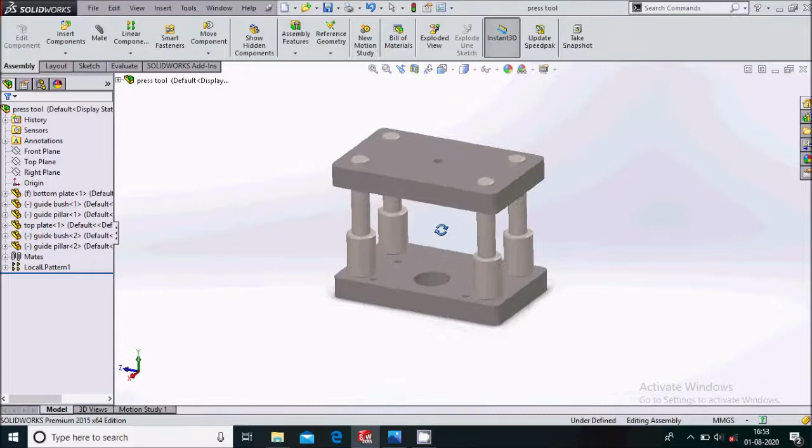Hello everyone, in this video we will create a simple press tool based assembly in SolidWorks. So let us start.

Go to file, new, click on a part, OK. So we'll first design the top plate.

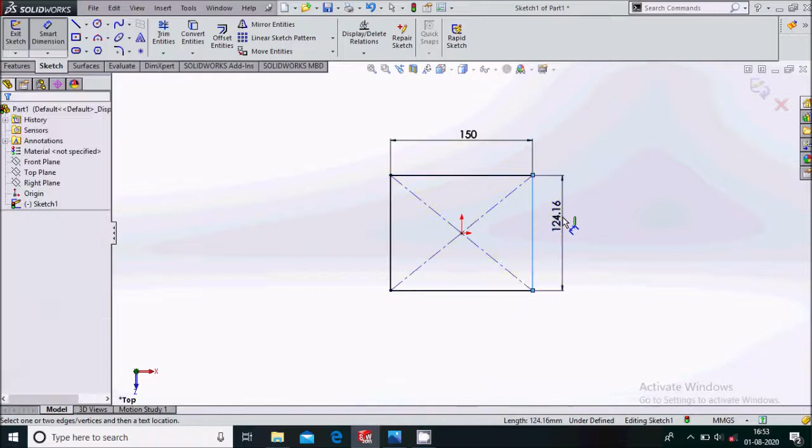Sketch on the top plane, select the center rectangle, draw a rectangle by 250 by 150, so it should be 250.

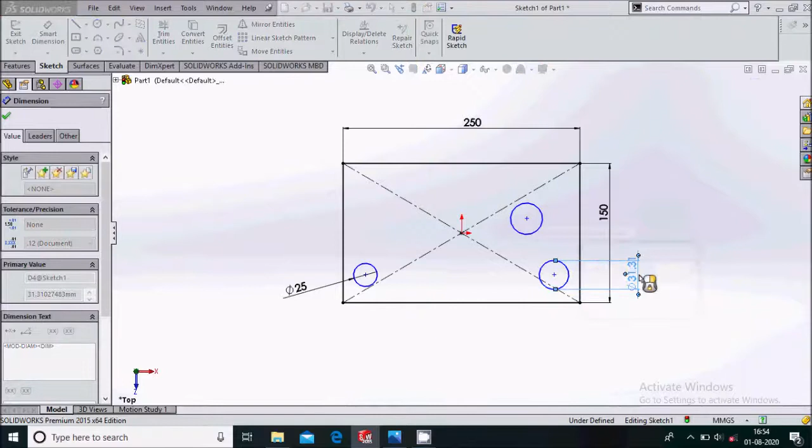Now we'll draw some circles over here. Smart dimension them, this to be 25 mm, this to be 25 mm, this to be 12 mm.

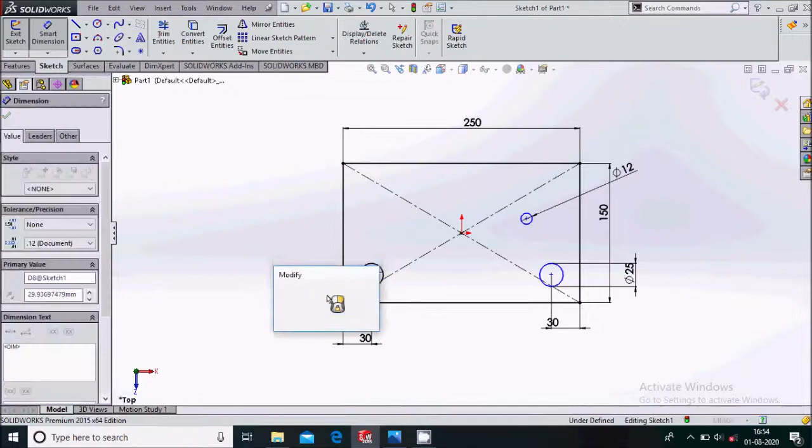Give the distances from the edges: this to be 30 mm, this to be 30 mm, this distance to be 30 mm, this distance again 30 mm.

We will give the distance of this and this to be 125, and from here the distance will be 75.

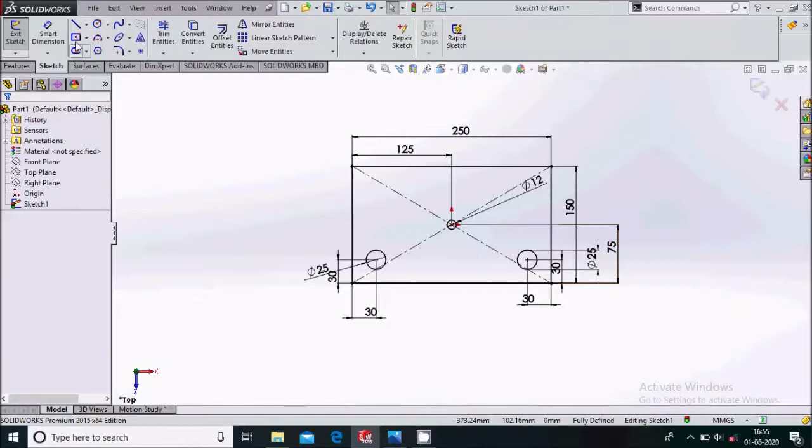Now we will draw a center line over here simply, and we will select these two circles and select mirror entities, and mirror about this center line.

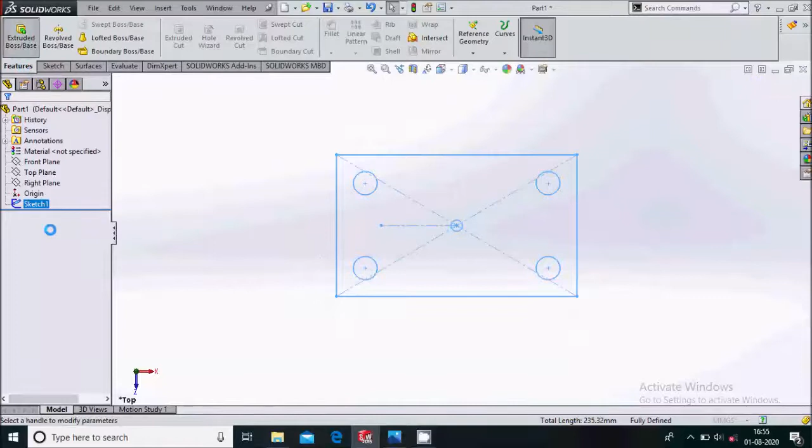We'll exit the sketch and go to the feature, extrude it by 30 mm. So this is our top plate which is ready.

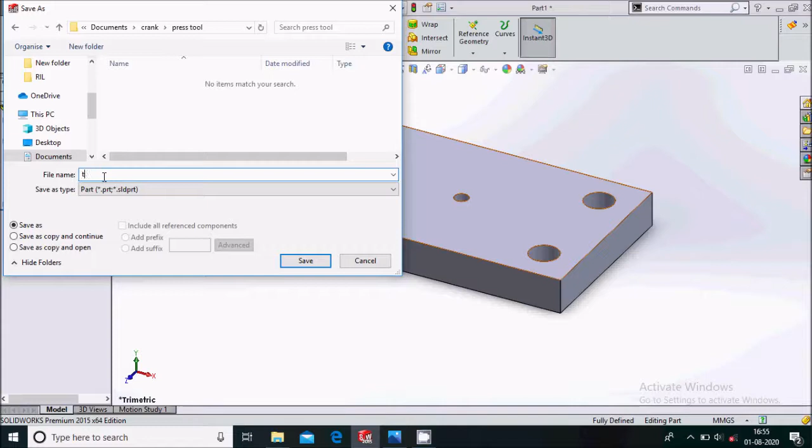Control save this. We'll make one folder over here, create new folder, and name it press tool. Open this folder and save this part as top plate.

After saving this, close this. We'll go to the next part, that is the bottom plate. Again we'll select the top plane, sketch on it, draw the same.

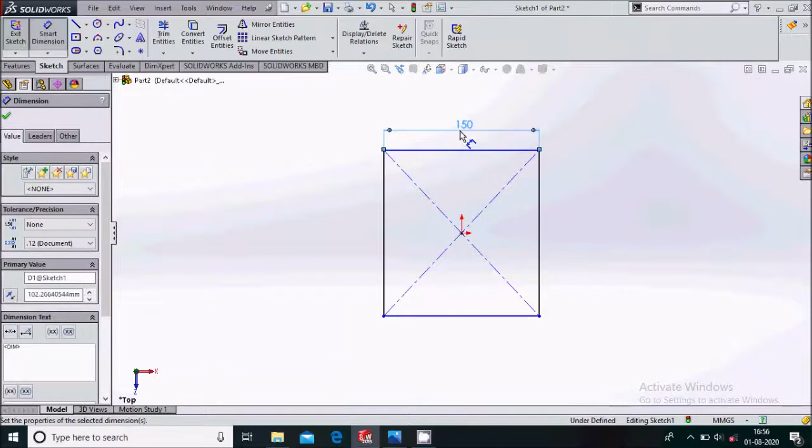Give the smart dimension, this to be 150, this to be 250.

We'll draw some circles over here: first circle, second circle, then we'll draw the third circle over here.

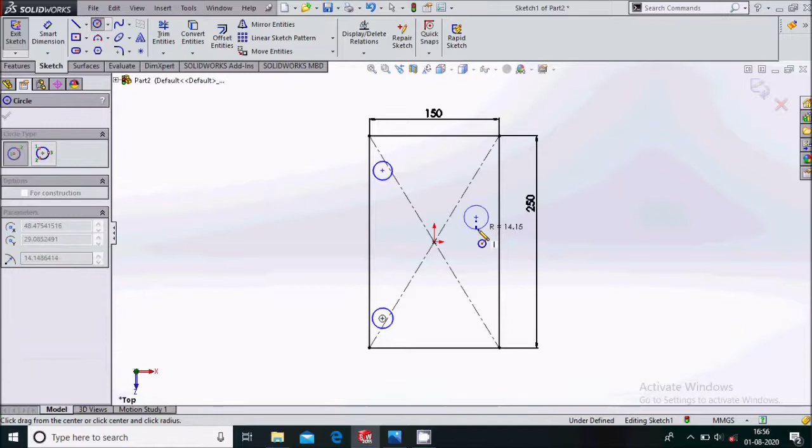Now smart dimension them: this to be 25 mm, this to be 25 mm, this to be 50 mm.

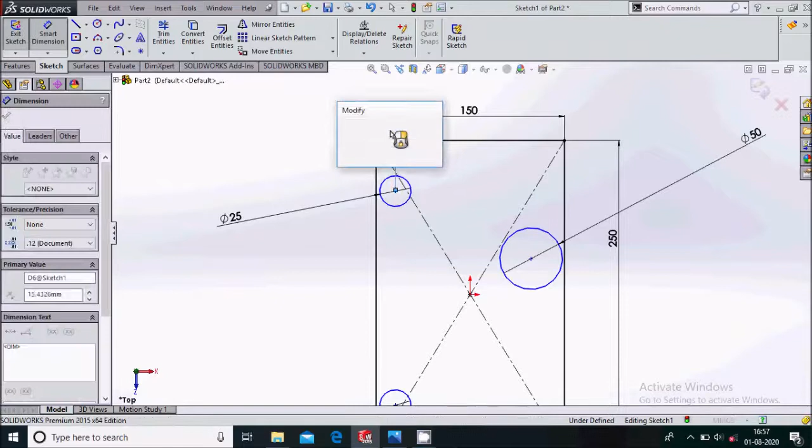Now we'll define its dimension from the edges. So this will be 30, this will be 30, this will be 30, again this will also be 30.

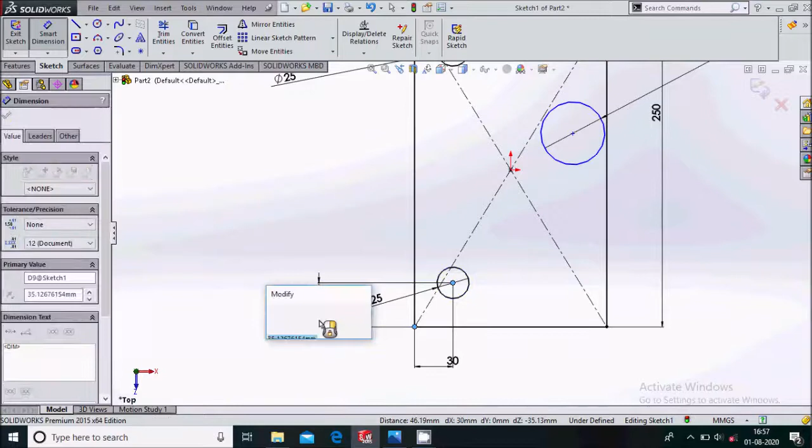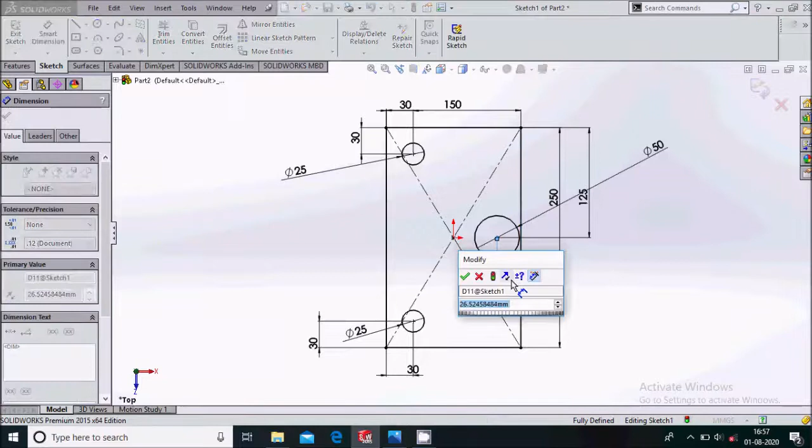So we have defined this. Now we'll define this circle also. Its dimension from this to this will be 125, and from here, select smart dimension, the dimension will be 50 mm.

Now again we'll draw some circles over here. We'll give some dimension to this circle: this circle will be 5, 10 mm. This will be again 10 mm.

We'll define their distances from the edges. Its distance will be 15. Distance between these two will be 70. Then this distance is remaining, this distance will be 55.

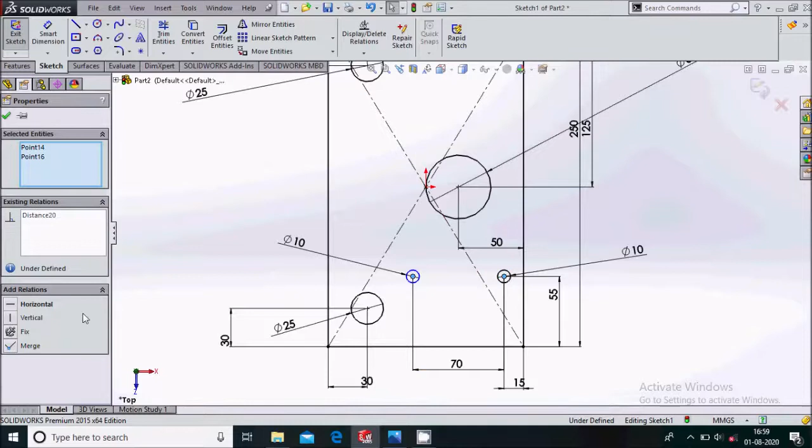Now this needs to be horizontal. Now here the sketch is fully defined.

We will again draw one center line, and select these two small circles, and go to mirror entities and mirror about this center line.

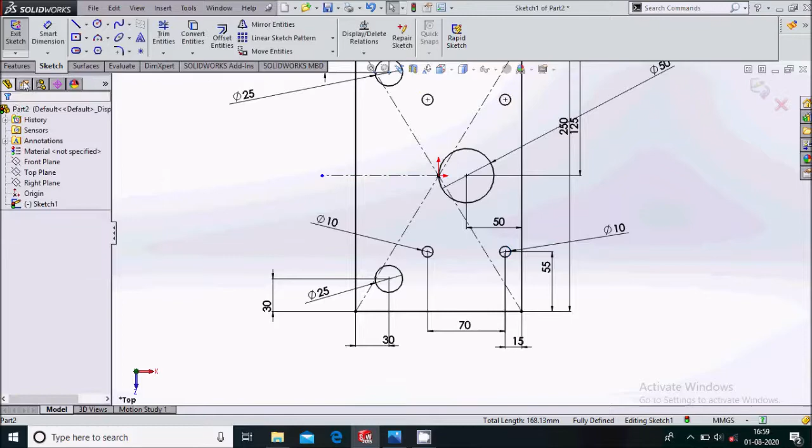So we'll go to the feature extruded boss base, and extrude it by 30 mm.

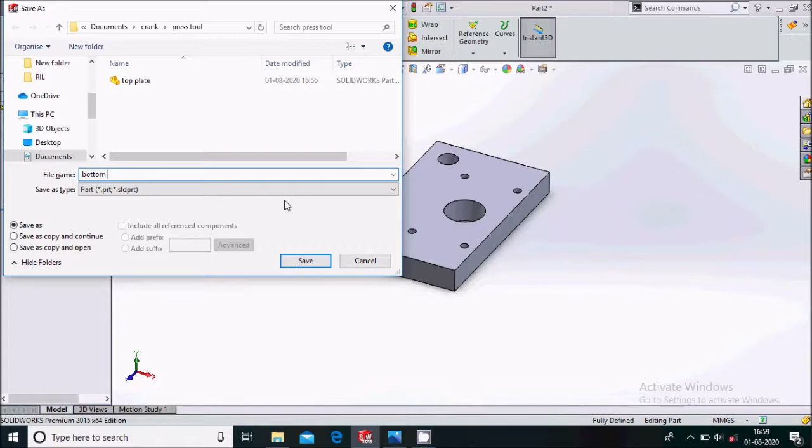Now we will save this part as bottom plate. Enter. Now here we will give the fillet to the edges.

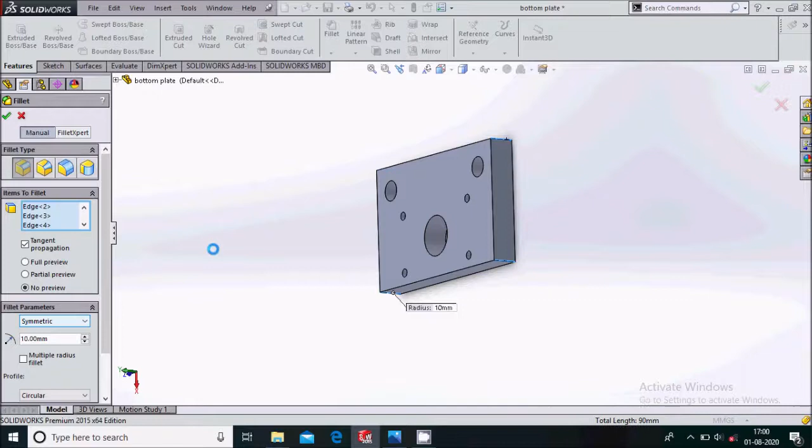Select this edge, this edge, this edge and this edge. We will give a fillet of 10 mm. So here we have given a fillet of 10 mm.

Control save this and close this. We'll again open here the top plate, and give fillet to these edges for the top plate which were remaining.

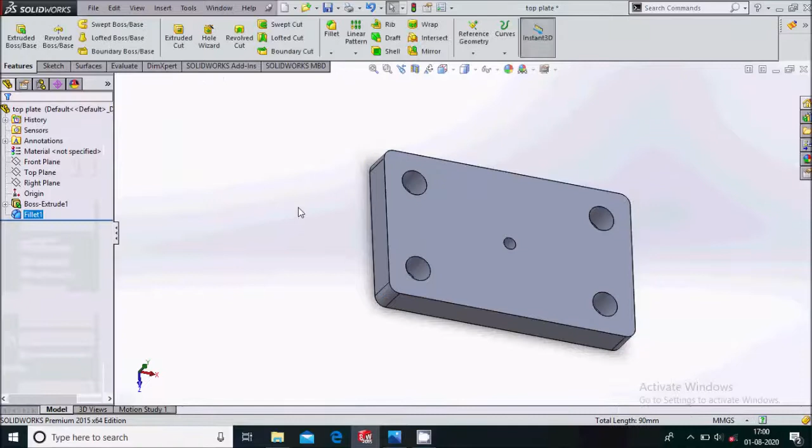Again 10 mm. So control save this and close this. We'll go on designing the next part of the press tool base assembly.

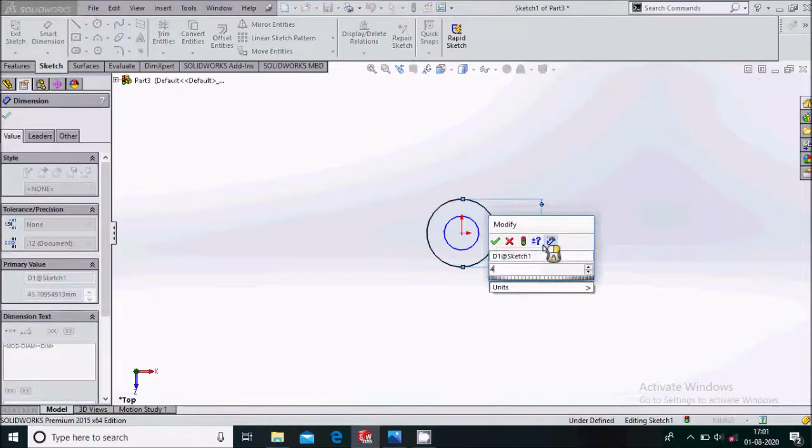So the next part will be: again select the top plane, guide bush. Here we'll draw two concentric circles, with the outside diameter 40 and the inside 25.

Go to feature extruded boss base. We'll extrude it through a mid plane by 60 mm. Say OK. Now we'll chamfer the outer edges.

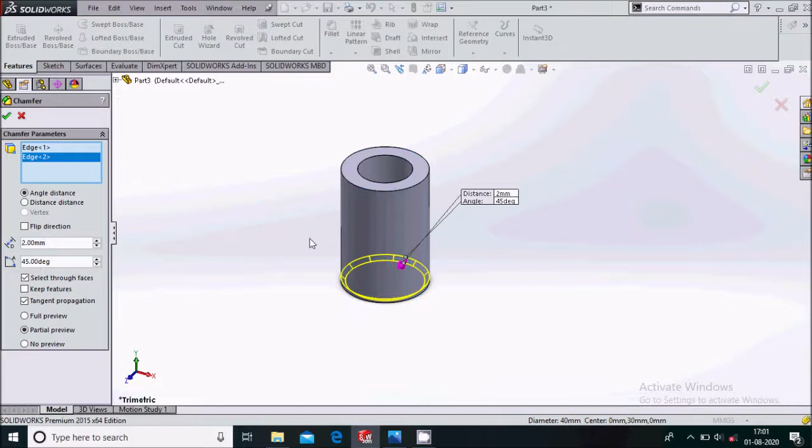Go to fillet, chamfer, select these edges and keep this distance 2 mm. Say OK. Now close this, control save this, and save it as guide bush.

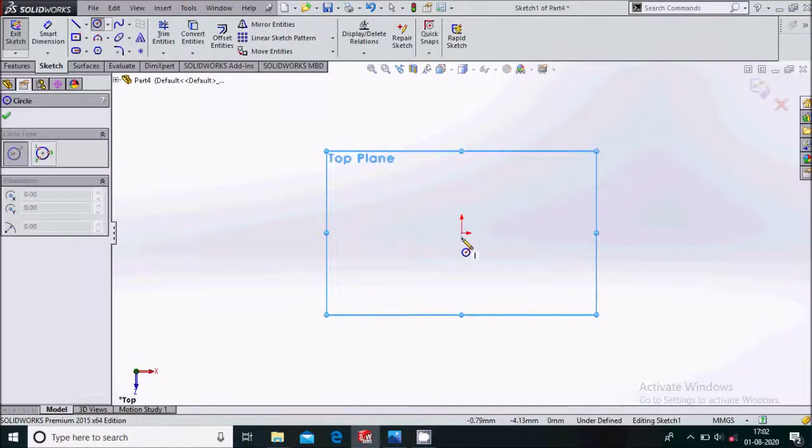So close from here, we'll go to the next part. Again here we will design the guide pillar. So the last part is the guide pillar. We'll draw a circle of 25 mm.

Go to the feature extruded boss base. We'll extrude it again mid plane, by 200 mm. So this is the guide pillar.

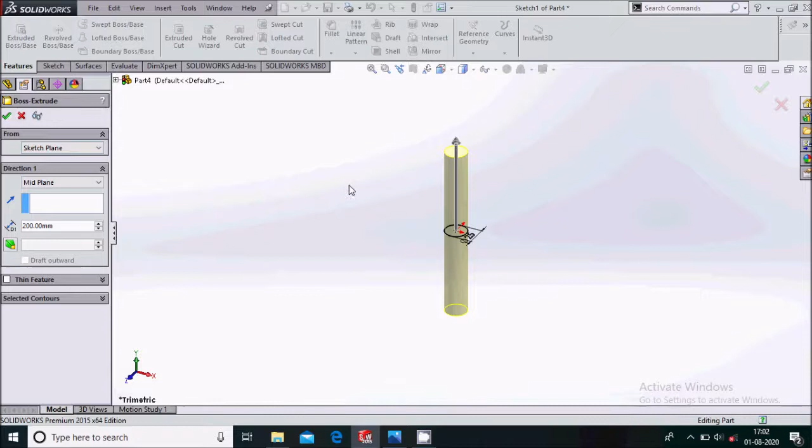Again we'll give the chamfer of 2 mm over here. Say OK. Now control save this part as guide pillar.

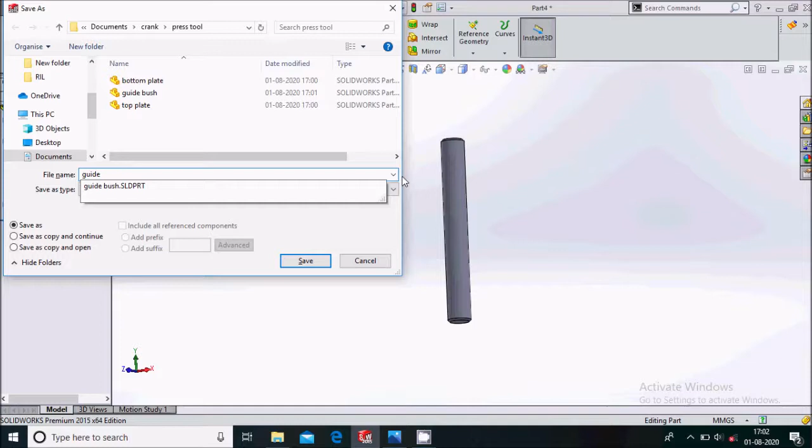So all parts are designed. We'll move to the assembly. So file, new, assembly. Now we will browse the parts that we have designed. So select all these parts, open, one by one.

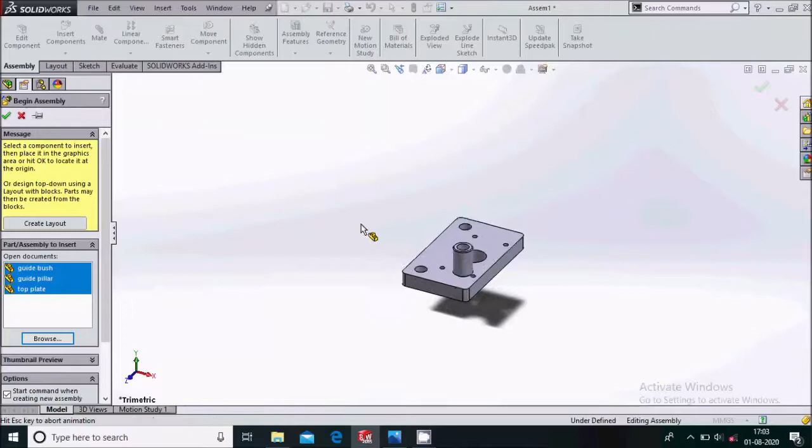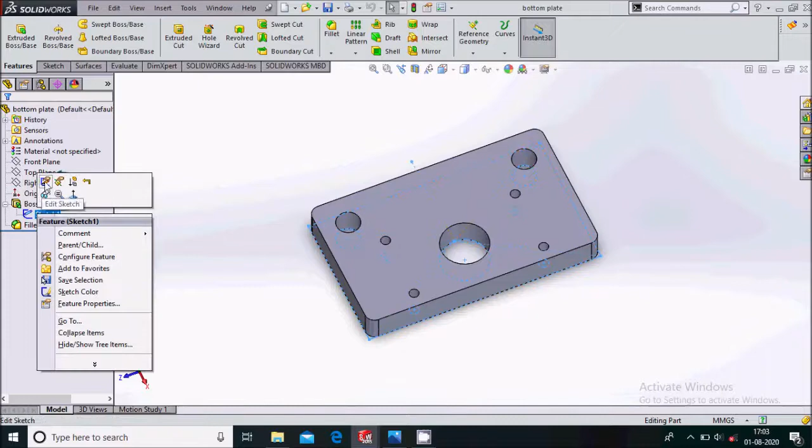So this is our bottom plate which is fixed. Here in bottom plate we will edit it again. So go to the bottom plate, select this, and open part. One thing is remaining, so edit the sketch, make it normal.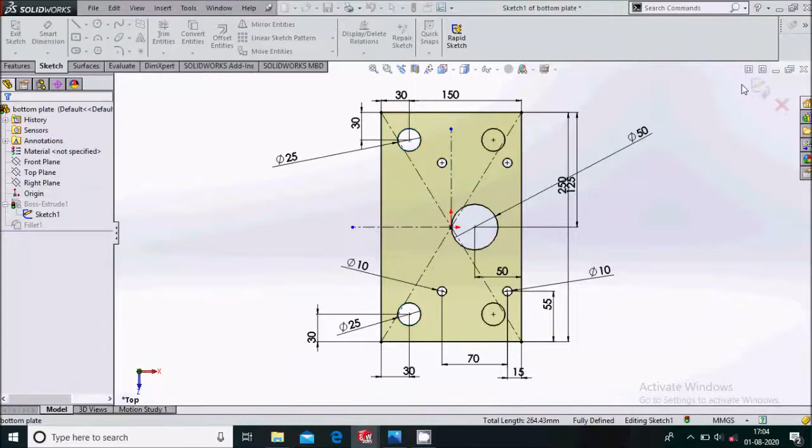We will select these two circles and mirror entities, mirror about. So here we'll first draw a center line, a vertical center line, then select these two circles and mirror entities, mirror about this. Okay, simply exit, it will update automatically.

Yes, and say yes to this again. So you can see the bottom plate is updated over here.

So here we will be needing 4 guide bush. So simply control, select this, control, select face and drag, so we'll get 4 copies. Again we'll need 4 copies. Actually 2 copies are okay, so we'll just delete these 2.

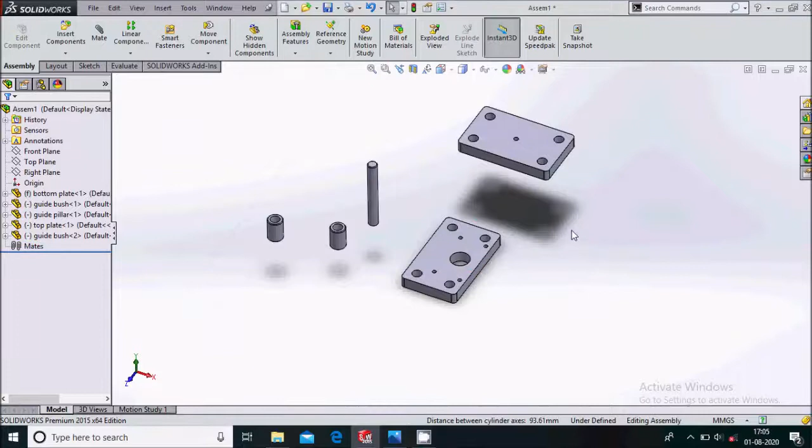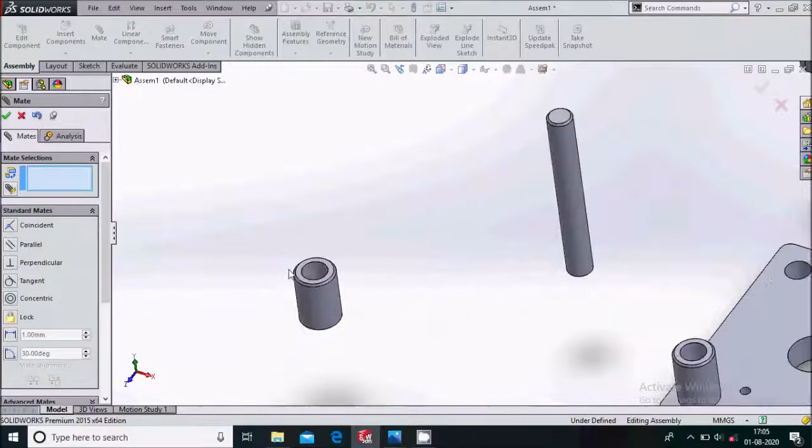So now we'll move on to mate. Simply select the mate, select this face, concentric mate, select this face, coincident mate. We'll select again this inside face and this face, concentric mate, select this face and bottom face.

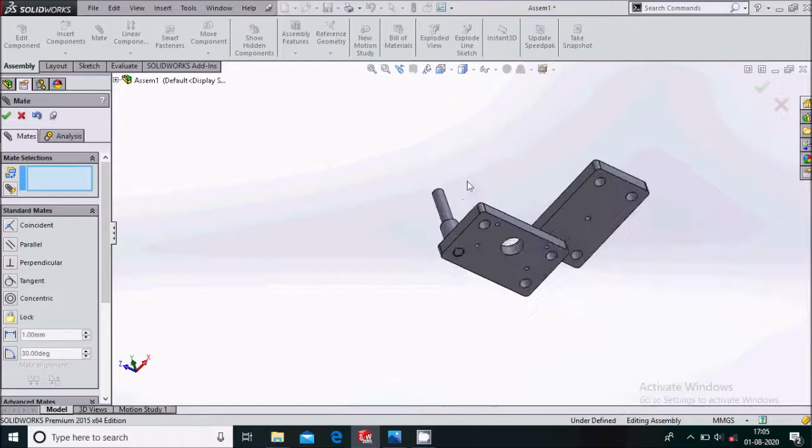Coincident mate. Select this face and this inside face, concentric mate. Select the bottom face and bottom face of this. Again we will do this.

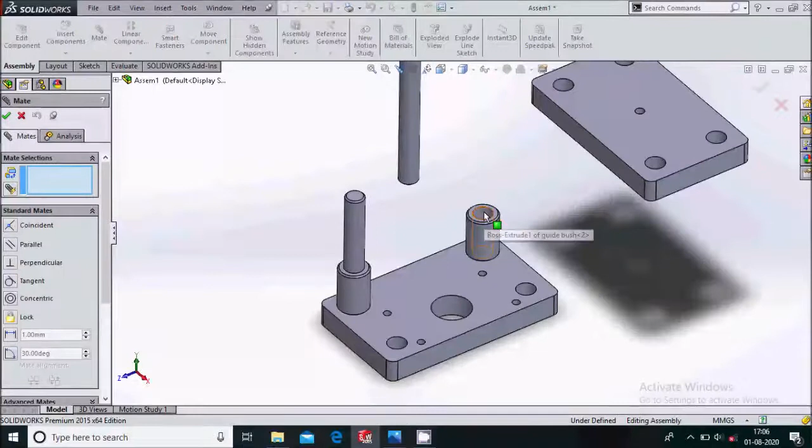So here we will be requiring the 2 guide pillars. Control select. Now we will select the mate again, select the inside faces and this, concentric mate again, and select this face and the bottom face, again the coincident mate.

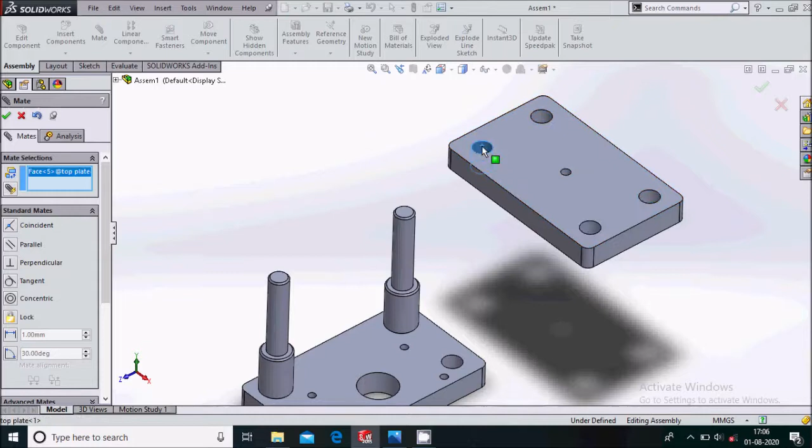Now over here what we'll do, we'll just select this face and this face, concentric mate.

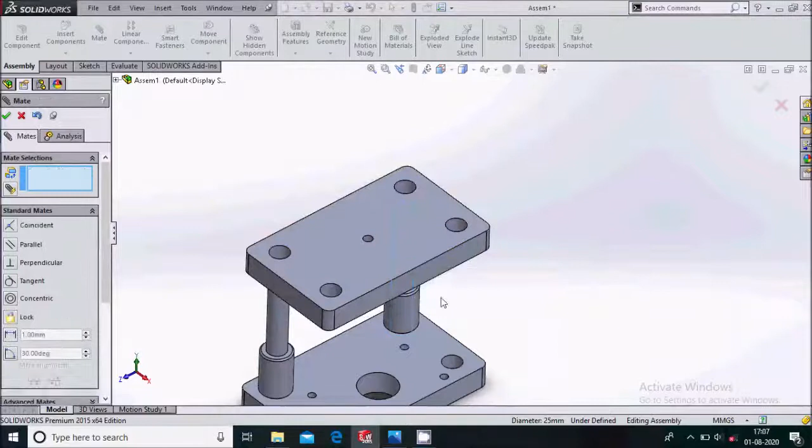Now delete the last mate. Yes, select the mate, select this face and this face. Select this face and this face. Select this face and this face.

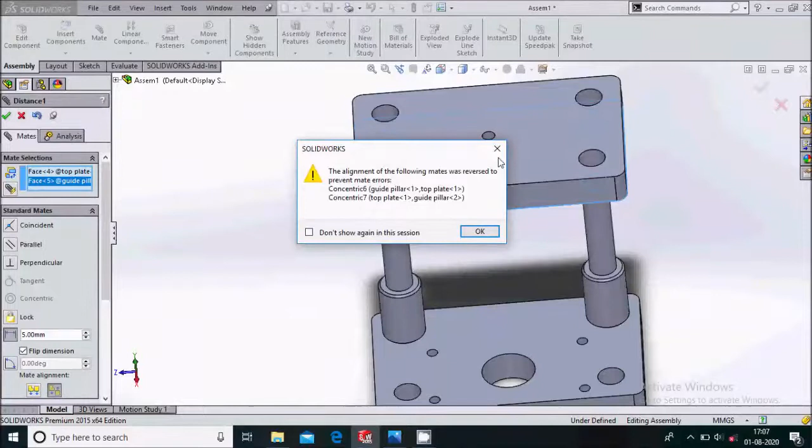Now here we will keep the distance of 5 mm. Flip the dimension. So simply click on flip dimension, so the distance will be 5 mm.

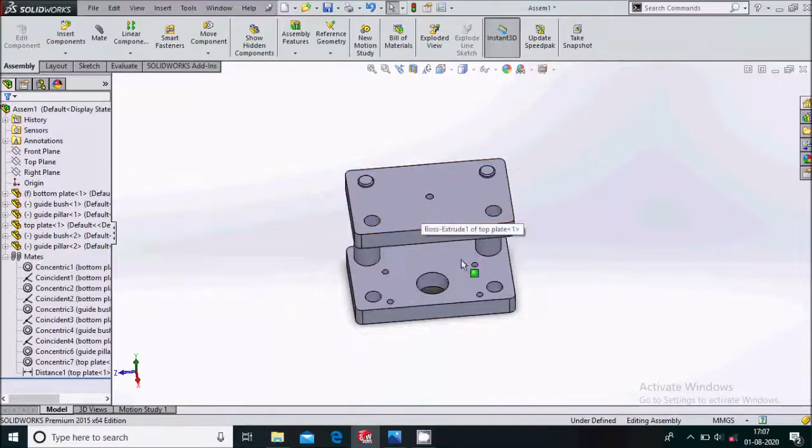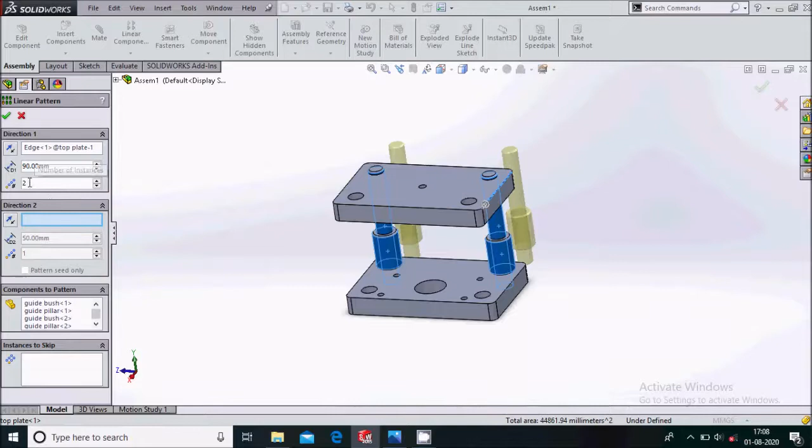Now here what we will do, we'll simply pattern these two. So simply select all these components and go to the assembly. You can see a linear component over here. So select the edge, select 2 number and reverse the direction simply and say OK. So in this way our press tool base assembly is ready.

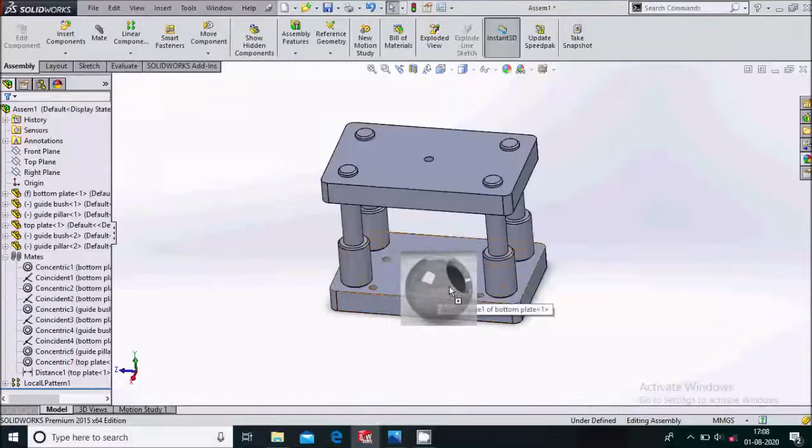We will give the appearances to this. Go to appearances and select the metal, steel. First select the polished steel, so just drag this over this, say to the entire body. Again go to this, select the polished steel, drag over the top plate.

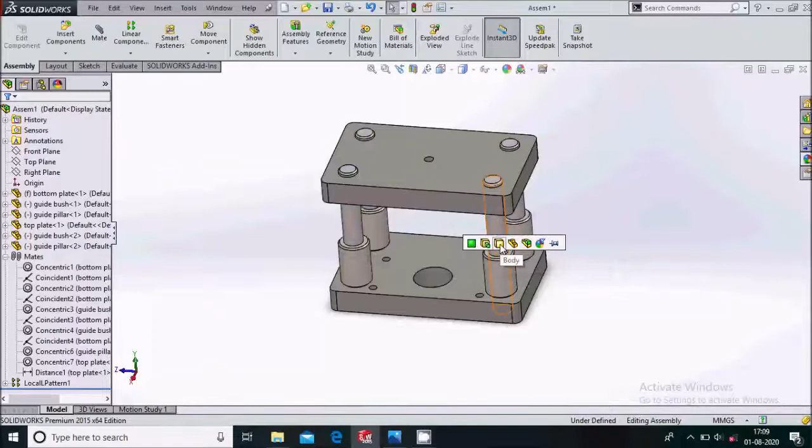Again go to the appearances, now select the brushed steel, drag over this body. Again select brushed steel, drag over the pillar body. So in this way our press tool base assembly is ready.

You can see a press tool base assembly over here. So this is our press tool base assembly. Hope you like this video. Thank you for watching.